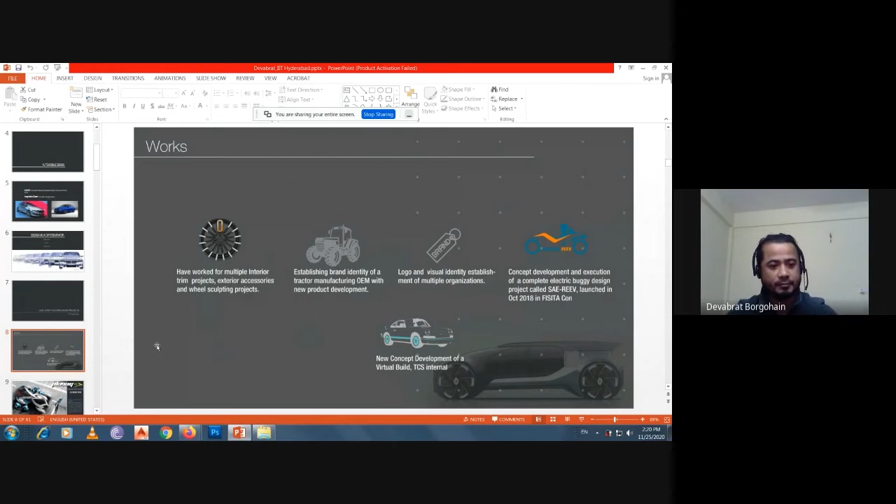Then I have done multiple in-house projects. My latest accomplishment is I have developed a virtual build of a concept which will be used for our portfolio works. So coming to my projects, I will just show you a few of them. This is one of the projects, which I named Plavag. Plavag is a Sanskrit word for toad or frog.

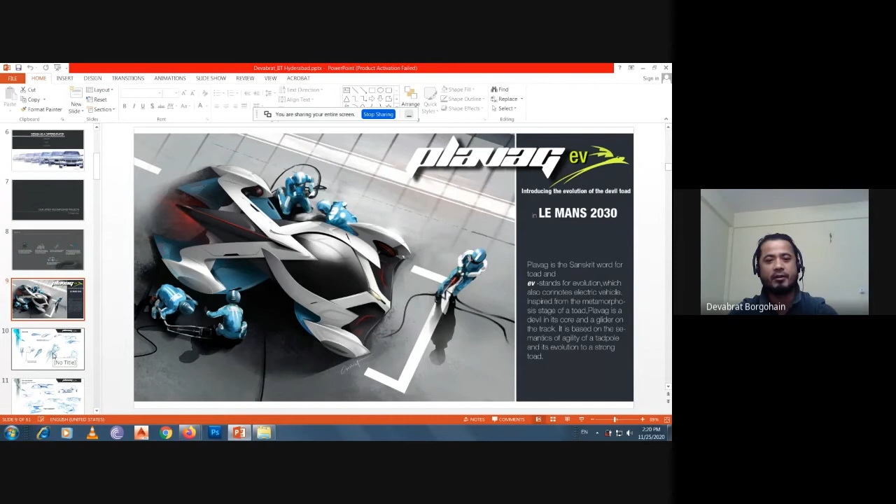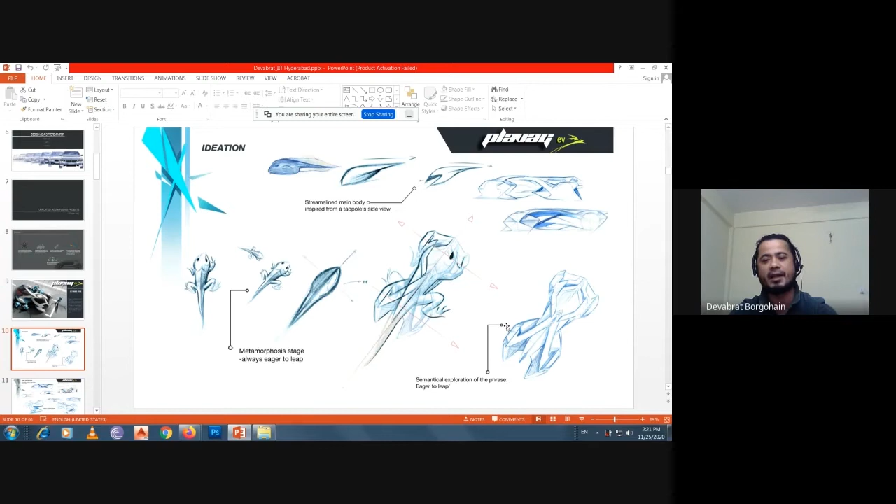As I have already mentioned, I like biomorphing and biomimicry. When you see this particular vehicle, you will get to know that it is completely morphed from a frog, or the infant of a frog. In the ideation phase, I took the tadpole for the side view, and then I morphed it to this particular side view. The same tadpole at the metamorphosis stage can be seen here, and I generated my concept from this metamorphosis stage of this particular animal. This is my ideation stage, the key sketches that I did for that vehicle, and the final sketches, detailing and all.

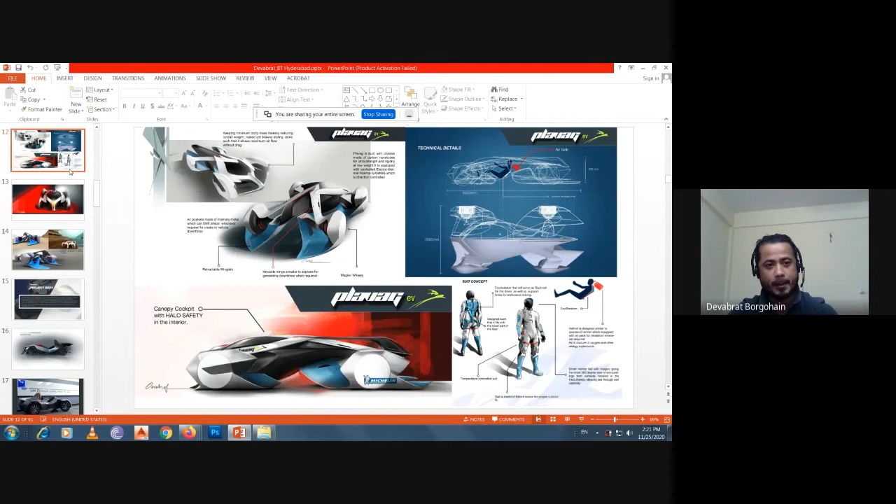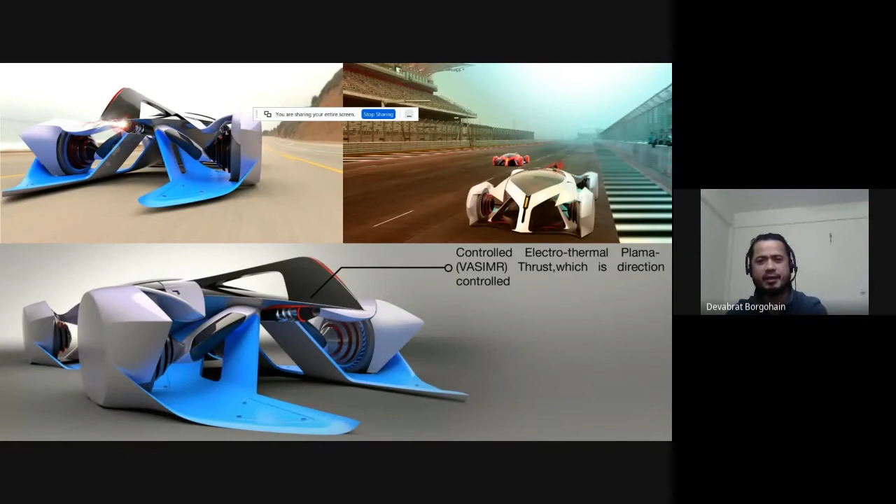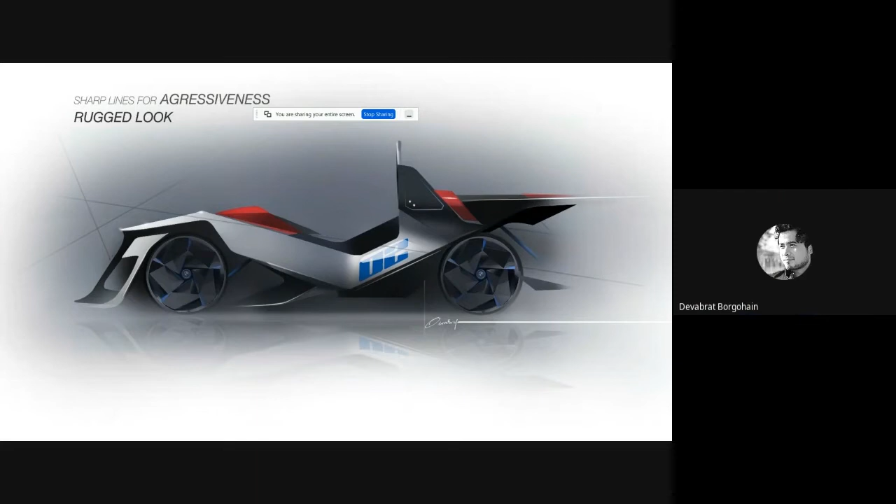Then coming to my second project, Project Reef. In Project Reef, the car that we developed was named Aerofold. It was conceptualized from the folds of origami. The initial idea was to develop a car inspired by origami, so we wanted multiple folds in that car, multiple sharp edges. That was the initial idea, but the final output is a little bit different. We did a lot of iterations, and the final output is what you can see here.

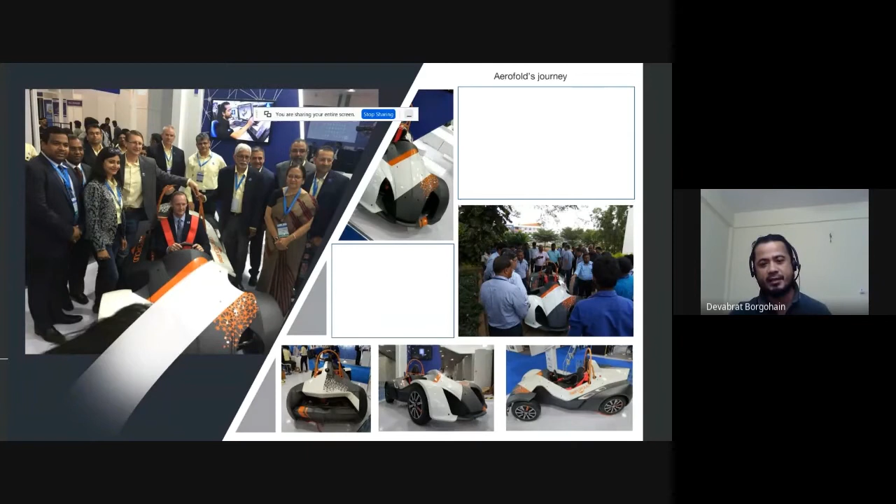This was launched in the FISITA conference held in Chennai. It is mainly for students. There's a competition called SAE-REEV, which they are planning to launch pan-India. The colleges will be asked to develop the car, and the design will be pre-built, the same design that I have done here. People can change the color and other graphics, and they'll have to develop the engine, a hybrid engine, for the competition.

Then there is a concept that I did called E-Raptor, which is basically inspired from the Velociraptor. So it's another biomorphing project. So I was watching some movie, and then I saw this creature called Velociraptor. So I was quite inspired by that particular dinosaur. So I took it and then tried to incorporate it in my particular design.

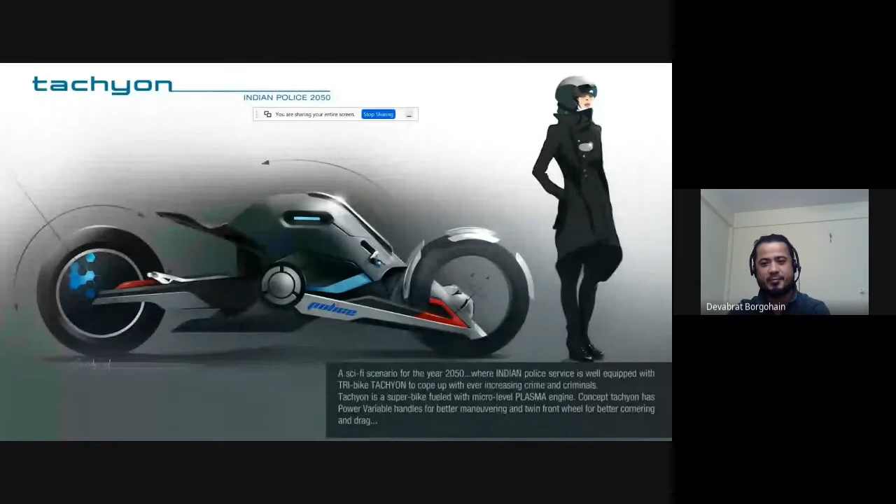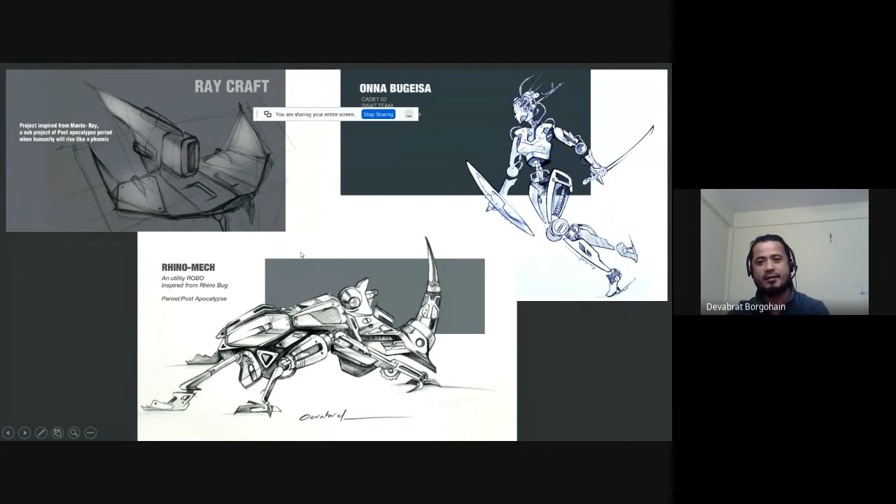This is another project that is my pet project. So it is not any official project. So as I have already said, I like to imagine things which are non-existent, and maybe in distant future it can happen. I'm fascinated with mechs and aircrafts and other vehicles. So I just like to imagine non-existing products. These are a few examples of it. These are some hand-drawn sketches or Photoshop renderings.

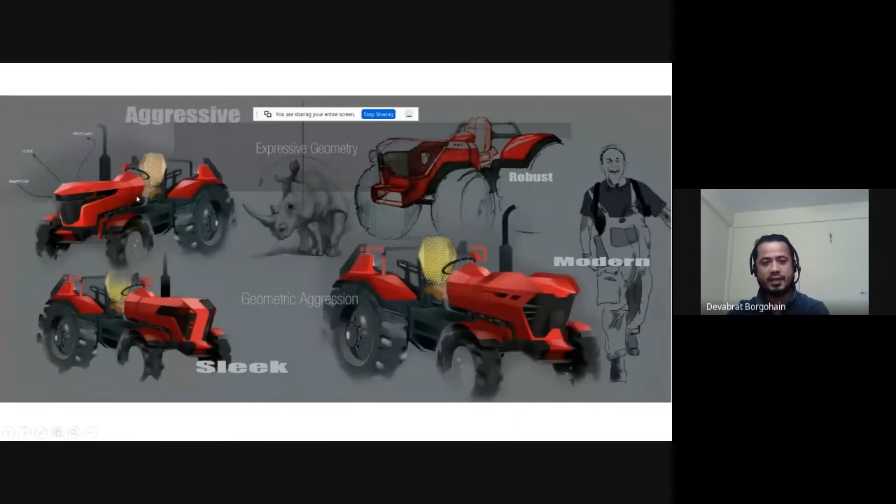Then this is another project that I did for one particular OEM, which I cannot mention the name of here. I did the initial concept phase of the tractor, because the final concept is somewhat similar to the first model you can see over here. So it is under production process. These are some other sketches.

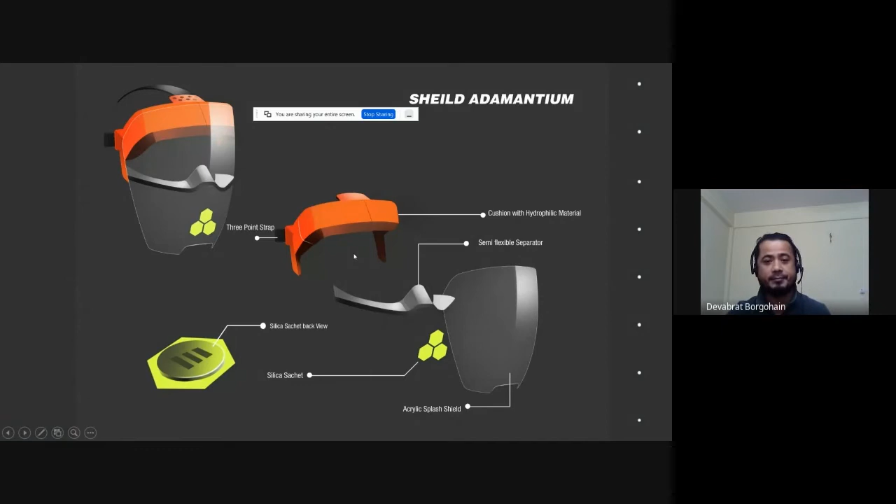Then during this COVID period, one of my friends approached me that he wanted to develop a product. So they wanted to develop some shield for the doctors or the medical practitioners who are working in the field. So this is another product design work that I did for my friend actually. So this is also under production. These are a few product sketches.

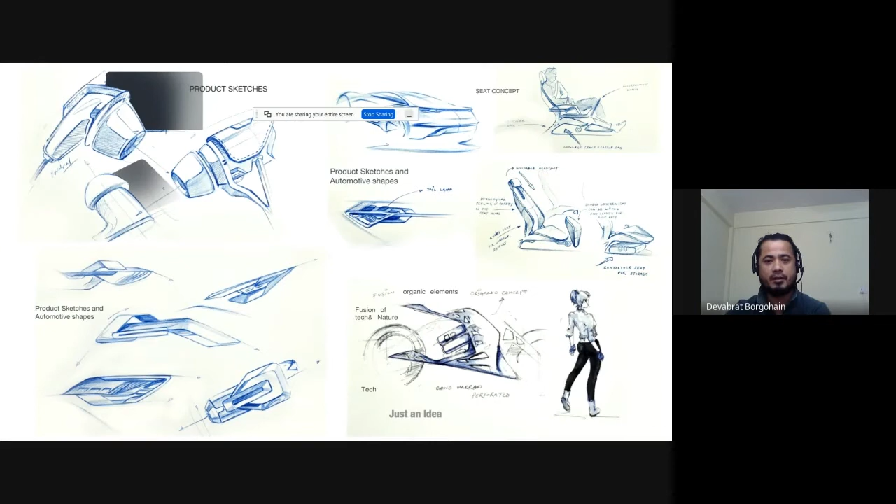Then coming to the illustration part, I am showing all these images to you so that I wanted to let you know that even if you are in the industry, you need to practice. So it is absolutely necessary to keep practicing. Otherwise, you will lose touch with the field, and design is a process where you need to learn continuously. It cannot be finished with one degree or one day or maybe two years.

I mean, you will be doing MDes for two years. So you cannot say that after two years you will be a complete designer. So design is a never-ending process. So, as I say, you need to keep practicing, I think throughout your whole life.

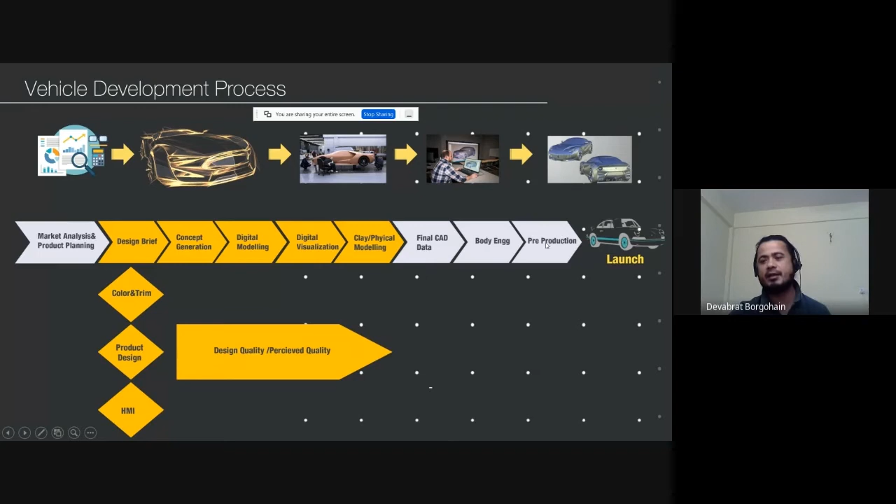What they do is they will put thickness to those surfaces. The designer or the digital modeler gives only the outer surfaces, which are visible to our naked eyes. The thickness and all those things will be given by the body engineering team. So they will put ribs, they will put holes for nuts and bolts. All those detailing will be done by the body engineering team. Then there will be other works which will be pre-production works. Then the final vehicle will be launched.

So I will get into the detail of each and every department. The initial phase is the creative department. Creative design is the concept generation phase. So here the designers will doodle, sketch freehand, and then they will use different softwares like Photoshop, Autodesk Sketchbook for rendering, and they bring forth their concept that is planned during the initial market analysis.

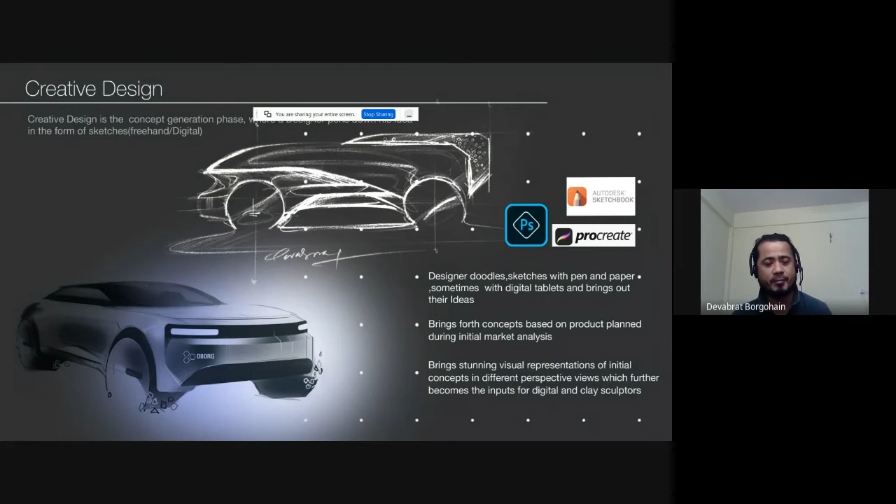Then comes the digital sculpting, that is Class A surfacing. Class A surfacing is nothing but the visible surfaces that you can possibly see from outside. All the visible surfaces are called Class A surfacing. And when we talk about the Class B or B surface, it is the inner surface that becomes the thickness of the vehicle. So whenever you see a vehicle, the outer thin sheet that you see will have thickness, right? So the inner part will be the thickness, that is the B surface, and the outer surface that you see will be the Class A surface.

So here the digital modelers take extreme care to get a proper highlight of the vehicle. Whenever we design a vehicle, the color that we put on the vehicle will be very reflective in nature. So whenever light falls on a particular surface, if the surface is twisted a little bit, if the quality of that surface is not good, then the reflection you will be seeing will not be good. So a digital modeler has to take utmost care to have a quality surface on the outer body, so that the reflection and the shadow that a vehicle creates will be pleasing for the viewer's eye.

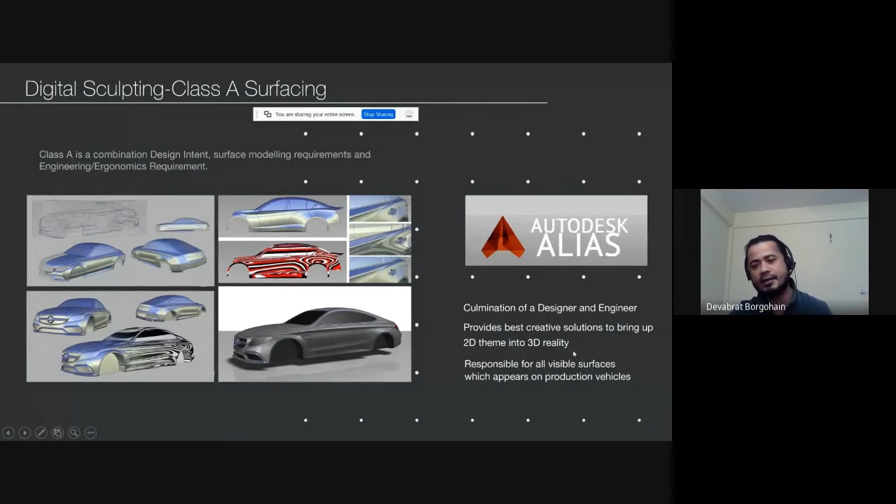Then coming to the next phase, it is the clay modeling. In this clay modeling phase, it is one way to transform the 2D sketch to a 3D tangible product. So in an industry, we do clay modeling to get the touch and feel of the product, the actual size of the product, and how the shapes will be converted to forms and how volumes will affect.

So a designer might imagine a certain concept and then he might have drawn it on paper and digitally he might have rendered, but he would be very eager to get a feel of the vehicle before its production. So what we do is normally we'll sculpt it freehand, or there are machines to mill it. So depending on the requirement, we will do the milling if the digital model is ready. If it is not ready, then we'll work freehand.

Then once the designer gets the feel of the vehicle, he will redesign each sketch depending on his requirement. So in the industry, we use industrial plasticine. It's a kind of clay, industrial clay. So it's not actual clay.

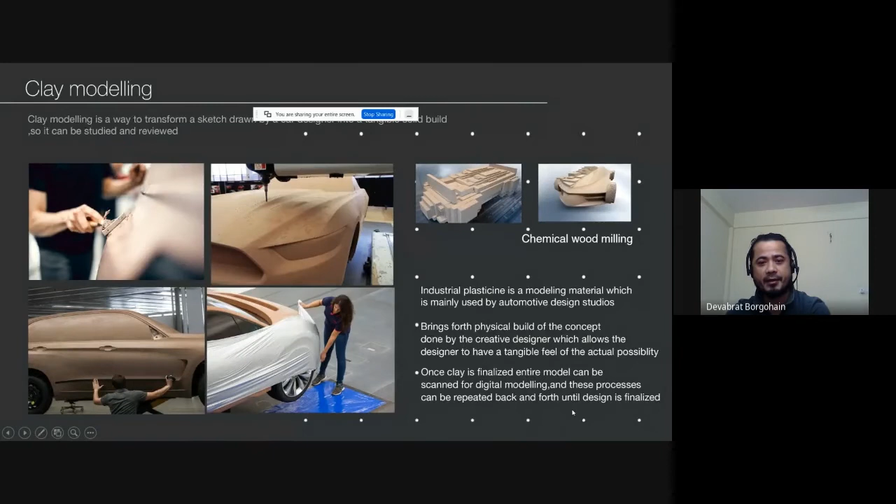Then comes the visualization part. In this visualization part, what we do is we take that 3D model and then we do ambient occlusion and ray tracing. So it is more about how lights will get reflected from a particular surface and how it will work. So we will take a ray tracing of the vehicle and then we'll render it in VRED.

There are different softwares used by different industries. Particularly in the automotive industry, we use VRED. So it's a part of Autodesk Alias. Then we have KeyShot. Then we have VRAY. Then there are other softwares used in the entertainment industry, like Unreal Engine. Then there is a free software which you can learn, Blender. So they have inbuilt visualization capability.

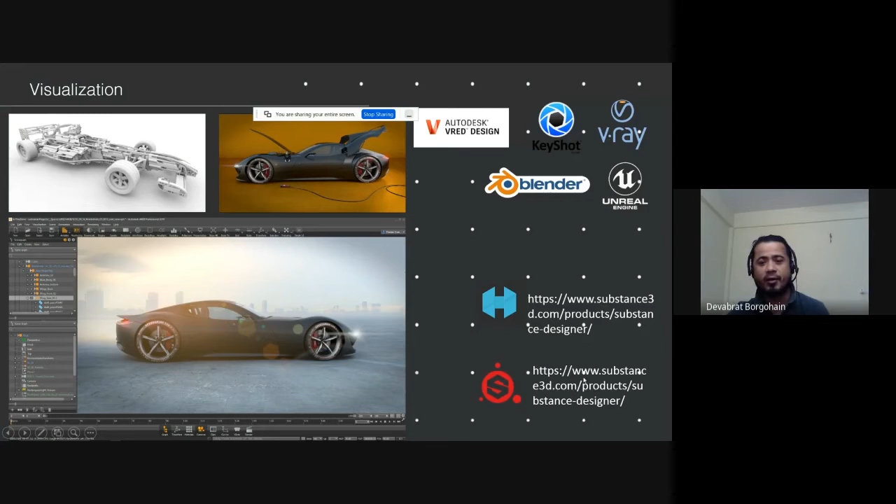There are a few links which you can take a snapshot of if you want. So here you can get all the HDR images and all different materials for different rendering purposes.

Then comes the HMI part. Previously automobiles only had an odometer and speedometer and a few components which were pretty simple. But with the advent of new technologies like smart gadgets and smart screens, the whole HMI is changing. So this is another department where the automobile industry is changing a lot. This is one important part of automobile design. Here it is mostly about the human and machine interface. So it is more of UX design.

Then comes the color and trim department. This is another department where people who are interested in graphics and the detailing part of the vehicle can go into this particular field.

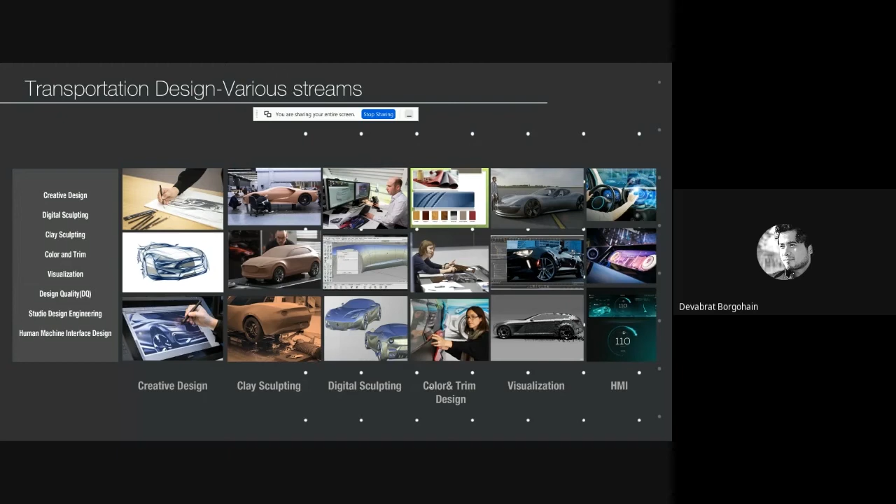Say the design quality department wanted a particular texture. That texture is not visible in the dashboard. So they will immediately reject that particular dashboard. So the other company who was building that dashboard should redo the whole work. They are the deciders of the quality of that particular product. So they have a good understanding of design, and they need to communicate well with the other design departments while working on it.

Another department that we have is studio design engineering, which we call SDE. In this department, they are the mediators of design and engineering. At certain times, engineers will have different requirements, and designers will have different requirements. So they will be communicating between both teams. They will try to make the designers understand what the engineers actually need and why something is not possible. And if the design is absolutely necessary, then they will try to convince the engineering side to accommodate that particular design. So they are the intermediaries between the designers and the engineers.

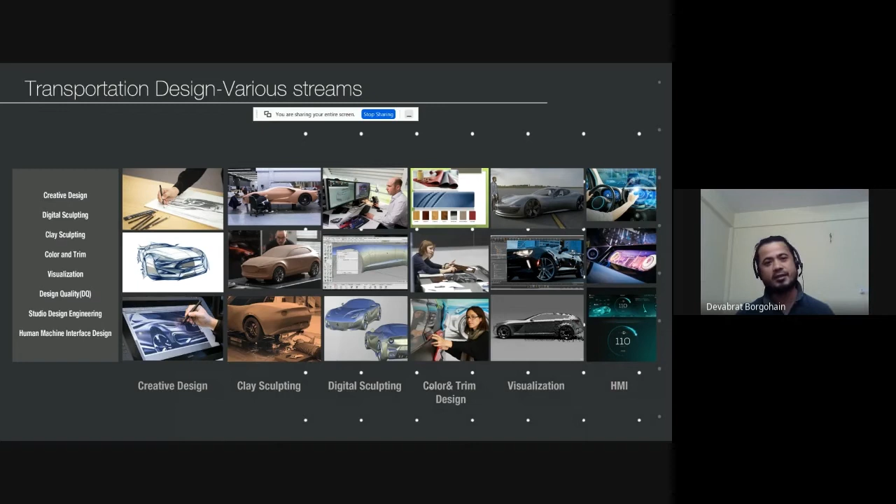So this is all about how the industry works. Then coming to the automobile industry, it is changing because of the advent of different new technologies. So when you talk about different products and the pace of innovation, we see that the mobile phone that we saw 10 years back was completely different, and now it is completely different.

So with the advent of new technologies, augmented reality, smart products, connected products, and then coming to other fields like aviation, where you can see people are imagining like Iron Man. I mean, they have exoskeletons produced. These are new technologies which are affecting the automobile industry as well. So we'll get into the other presentation.

So when we talk about, give me a second, please. Sorry.

Extremely sorry. When we talk about the automobile industry, the changes can be seen because the automobile industry is moving towards electric. Then it is moving towards autonomous. It is moving towards shared and connected. And as you see, the younger generation is technically savvy.

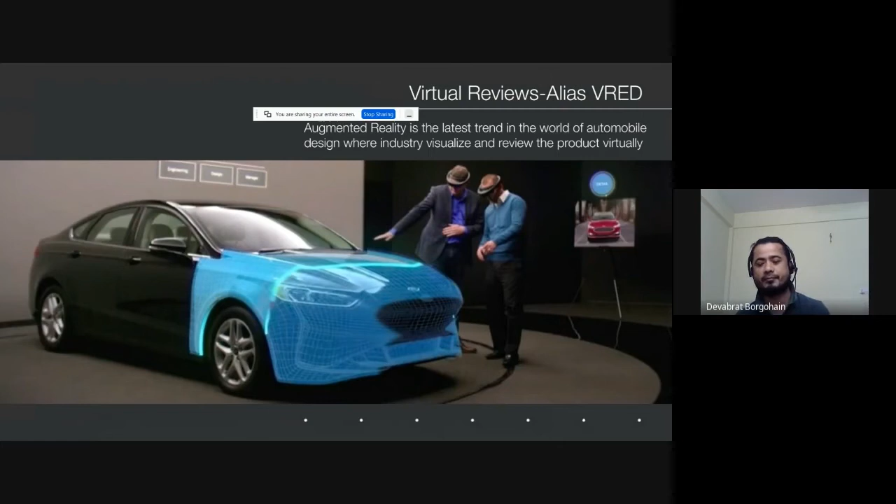Then, because of this VR, the creative industry is also changing. I mean, the creative design part of the industry is also changing. There are different apps for designers, whether you want to sketch or sculpt a full concept.

The softwares like Gravity Sketch, Tilt Brush by Google, Unbound Alpha, Substance Painter, then Oculus Medium, and there is, I mean, open source Mozilla A-Painter also. So you can explore these particular softwares; if you have those facilities in your lab, you can explore all these things. So the design industry is changing because of these technologies as well.

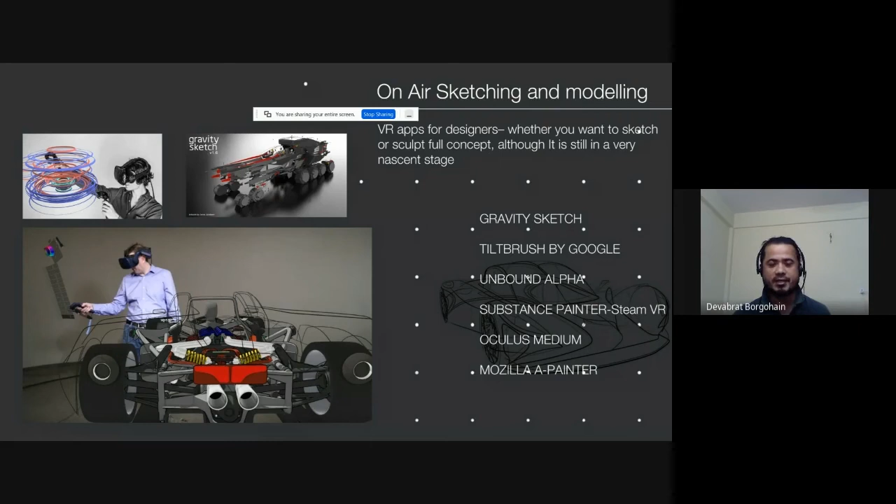Then coming to sub-D modeling, initially, the industry was very orthodox with the modeling part. The industry still uses Autodesk Alias as their main surface building software. But looking at the other industries, especially entertainment industries, they are getting inspired to work with other softwares as well. So they are trying different softwares like Blender, ZBrush. I am learning ZBrush for some project work for my office as well. So we are trying to develop certain workflows to develop a car in quick time.

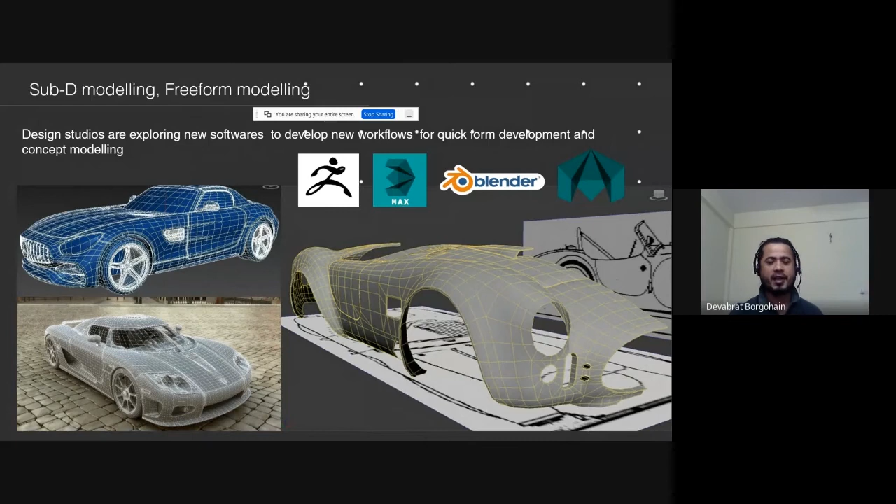So what happens is, sub-D modeling is like when you work with Max, 3ds Max, Maya, ZBrush and all. This is based on sub-D, and our traditional surfacing is NURBS based. So in sub-D modeling, we can quickly conceptualize the design. After the conceptualization phase, we'll take the same model to Alias for quality surfacing.

So what is it for us as a designer? I have talked about all these new technologies, new requirements and changes in the industry. So what is it for us? As the industry is moving towards the electric generation, we are trying to remove the fuel engines from our vehicles. When we talk about fuel engines, we'll have front engine, mid engine, rear engine. So if we don't require all those engines, then we have a lot of space left.

Whenever we put a battery in a vehicle, it will be mostly in the lower base part of the vehicle, that is the bed of the vehicle. So that means we have a lot of space which needs to be used. Because of these changes in the industry, the vehicle shapes will also get changed. So in the next 10 or maybe 20 years, the vehicles that we see on the road will be completely different from the vehicles that we see now. And when you talk about autonomous, since it is autonomous, you don't need a driver over there, so that particular module itself will be removed. That means the designer's approach towards designing that vehicle needs to be changed as well.

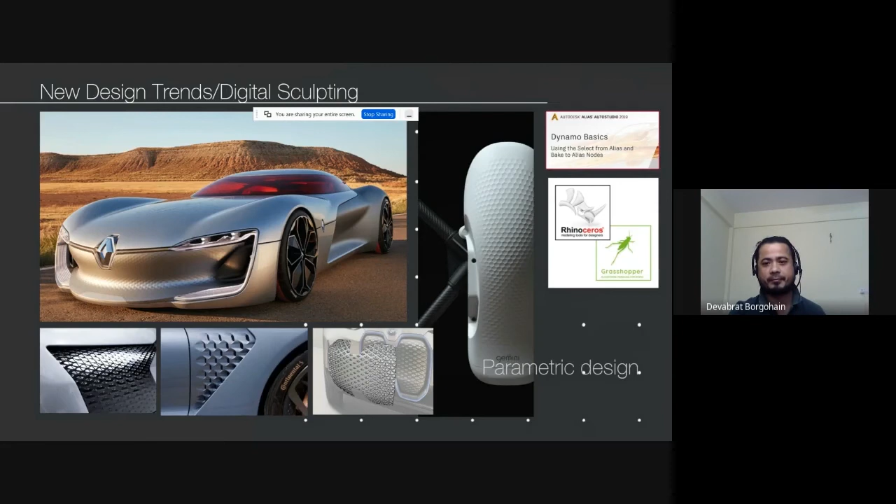Coming to the days before your placements, it's only 2 years from now; you have joined the MDes. Most of you will be joining UX, graphics, and you might opt for automobile or product design. So you need to prepare well for the industry. Whenever you prepare for the industry, you need to look into your professional resume, your design portfolio, and the career goals that you have set on that resume.

Then you need to show your online presence. When I talk about online presence, you need to update your LinkedIn profile very frequently so that you get frequent visitors on your profile. Then you can go for portfolio. You can upload your portfolios on Behance and other personal blogs.

Then you need to develop your skills as well. So you just have 2 years, but as I said, design is a continuous learning process. You can develop it in later stages as well. But practice is one thing which needs to be done regularly to get into the industry, because industry needs skill, and without proper practice, what happens is our theoretical knowledge will be pretty great, but our skill sets will be comparatively less.